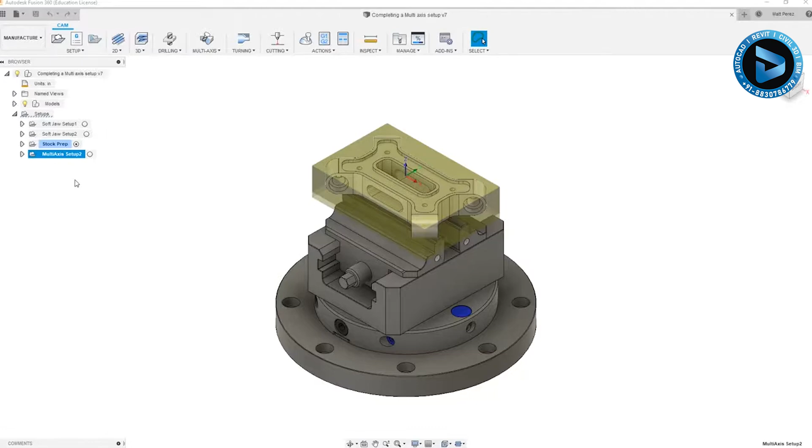From here, we've already created our soft jaw setup 1 and 2, we've created our stock prep, and then we've already taken a look at creating our multi-axis setup. At this point, the last step is to flip the part over and machine it in the soft jaws. So in order to do this, we need to create yet another setup. The first thing that I want to do is I want to expand multi-axis setup 2, and notice that we need to regenerate all of our toolpaths.

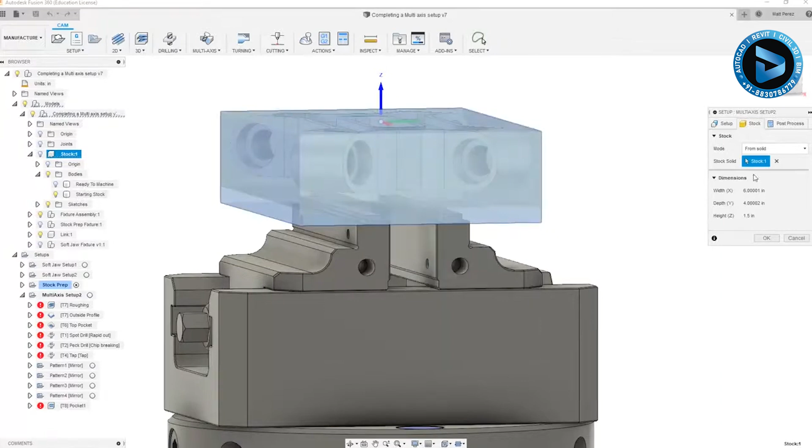But first I want to go into Edit, into Stock, and I want to take a look at the stock that's used from Solid. This is causing a problem because we made modifications to the original model that we used. In the original model, we simply selected the stock component. However, now there are two bodies in here, starting stock and ready to machine. So we need to deselect the stock solid and select ready to machine, then OK. Then use Ctrl G to generate all the toolpaths again.

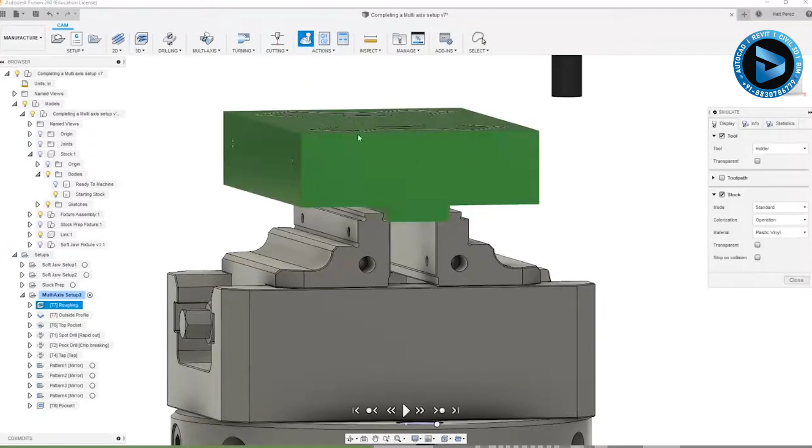So before we move on, we want to make sure that we take a look at the multi-axis setup. We're going to activate it and we're going to simulate it. I'm going to jump all the way to the end and make sure that we've removed all the material. This is also a good reminder as to what material is left behind. You can see that we have the area that is still being held in the fixture. Then we have a small amount of material that we have left underneath that we need to finish off. Then of course we have the pocket.

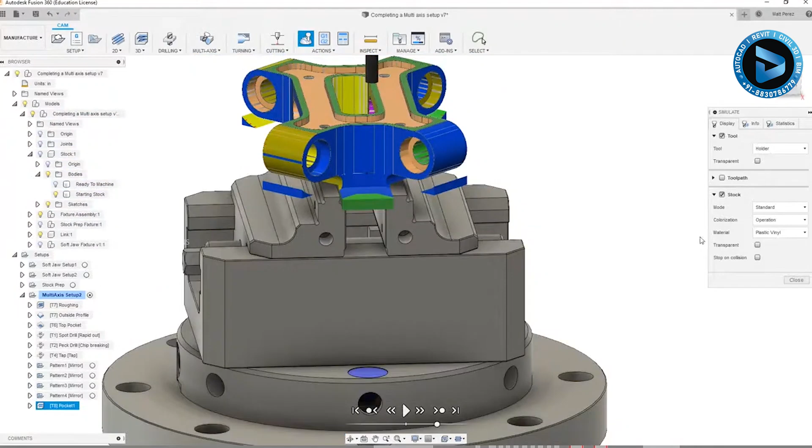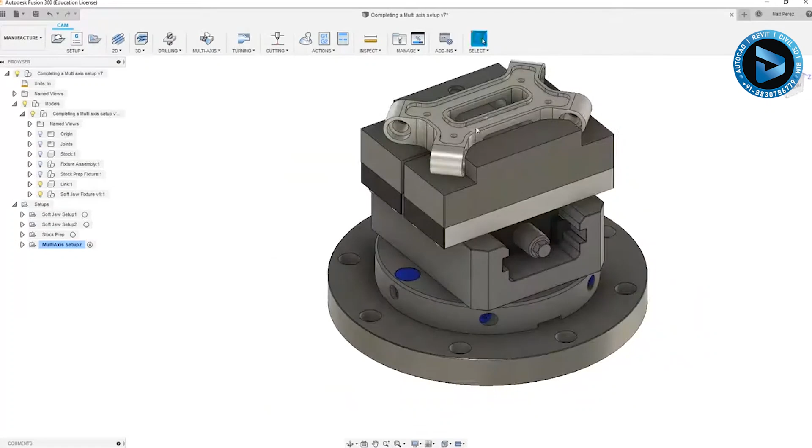So now that we know what material is left, let's create a new setup, and the new setup is going to be using a few different bodies. So we're going to minimize this stock component, and now we have our soft jaw fixture. We can hide our fixture assembly, and we can rotate this around and take a look at the results. So now we're going to be using this setup for our last machining operation.

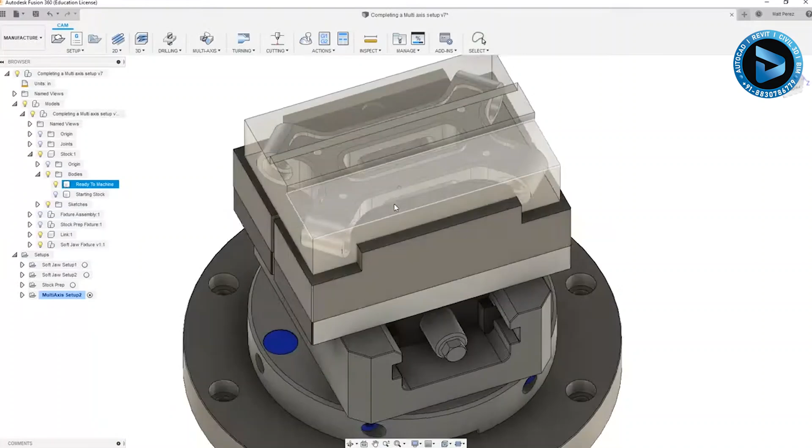And as a check, we can show the stock, we can expand it, and make sure that ready to machine is shown, so that way we have a good reference for the top face that needs to be machined. Keep in mind, however, the G54 location for our coordinate system is going to be based on that boss. So we will have to go back and forth hiding and showing the stock body at different times. I'm going to navigate to an isometric position here and simply move it to the center of my screen, then go to Setup and create a new setup.

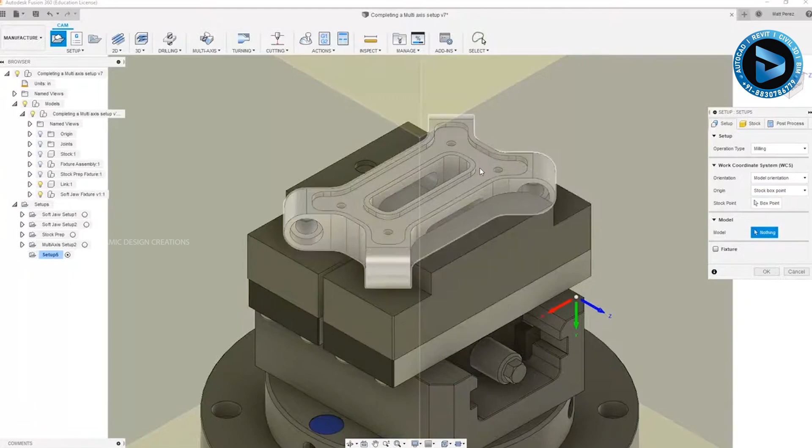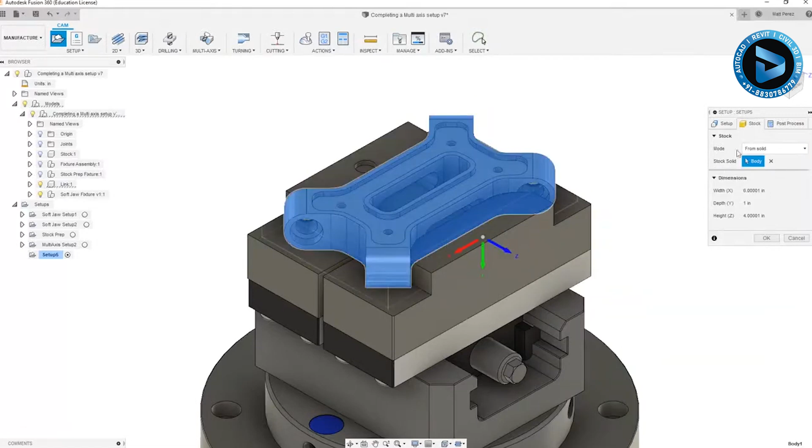We're going to be using milling, and the model that we're going to focus on is going to be our link. Then for the fixture, we're going to be using our soft jaw fixture. And we can determine whether or not we want to use the stock component as our stock, so that way we can actually see the material being removed, or if we simply want to say from solid and use this body as our stock. I'm going to increment the program number to be 10100. And now we have a new setup, in this case setup 6, but I'm going to call it link in soft jaw.

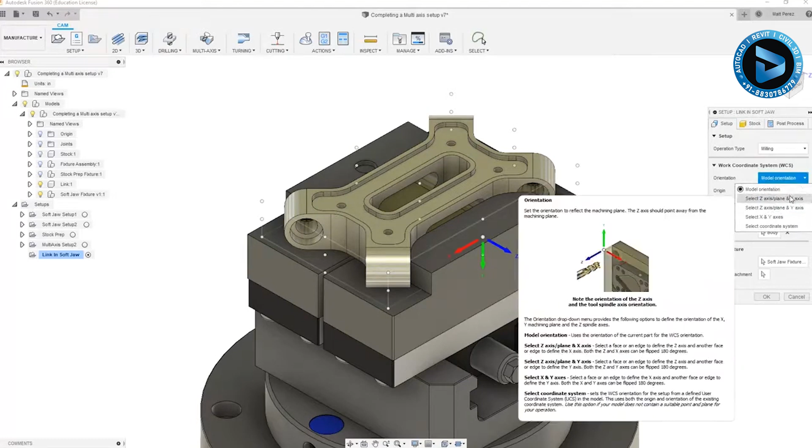Now that it's been created, I'm going to go back and edit and make sure that my coordinate system is correct. I'm going to select my Z-axis or plane and my X-axis. In order to do this, I'm going to select the bottom of that hole, and notice that the Z-axis is correct. I need to flip my X, and then I need to change the location. The location is going to be based on these box points. However, I can base it off of a selected point, a model origin, or a model box point.

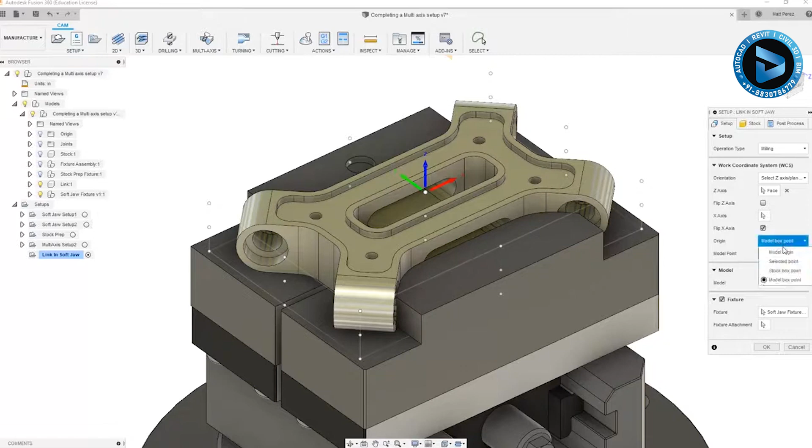If we select model box point, then you'll notice that we're not getting any change on the screen. However, if we do selected point, we will be able to select the center of that boss. So now you can see that X and Y will be located at the center of that, and Z will be based on the top face of that plane. So now that my coordinate system is correct, I can say OK. Again, I can navigate back to this isometric view using my view cube, and then I can save my file before moving on to the next step.